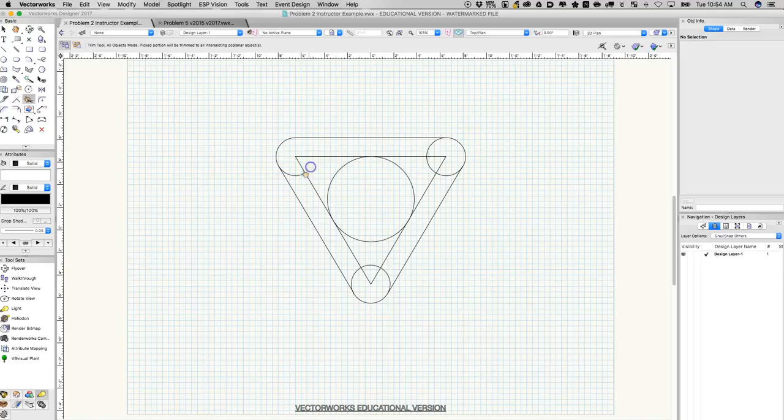So the first thing we need to do is we're going to do some trimming and cutting and some composing, and we're going to make this rounded rectangle into one piece. You'll see what I'm doing, so stick with me. So the first thing I'm going to do is trim off all these extra pieces of the circle. I'm going to grab my trim. See, I'm just coming along and trimming this guy just like this.

Okay, so the next thing I'm going to do is select everything, and I'm going to hold down my shift key and deselect this inner rectangle, this inner triangle, and this inner circle. So now I'm going to extrude, or I need to compose it first. I'm sorry, because right now if you look up here it's 7 objects. We need it to be 1 object.

So I'm going to come up here to modify, compose, and let's see why we have, let's see, it looks like there was an extra line in there somewhere. So good for us. I'm going to delete him. So now again we have our polyline, and I'm going to give this guy some fill. Let's give it solid, and now it's white.

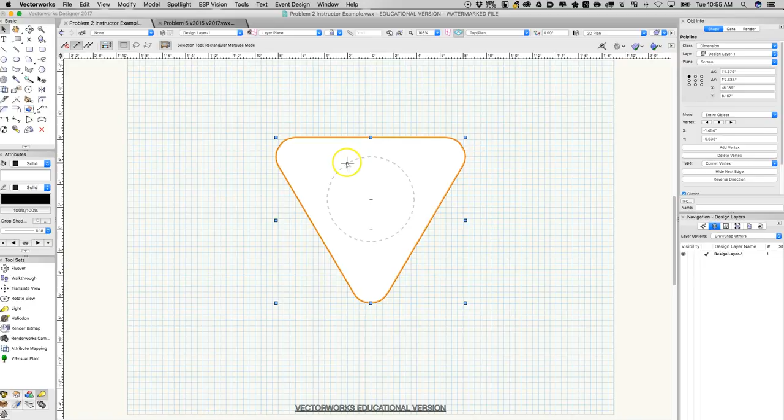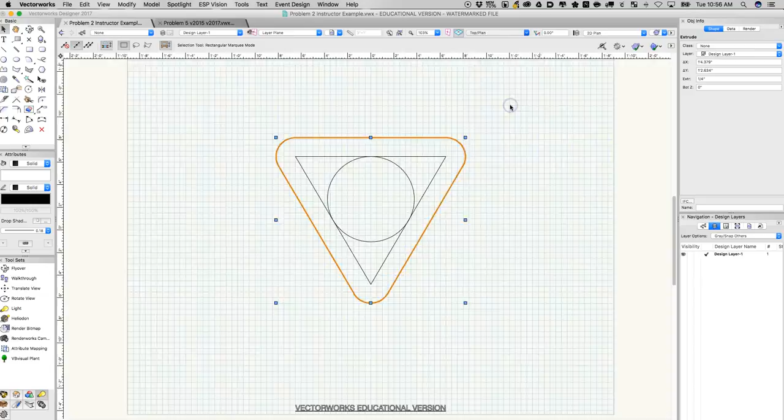So now we're going to extrude. And it looks like from the drawing that this guy needs to be extruded to 1/4 of an inch. So I'm going to go model, extrude, 0.25 inches. Okay. Now if we come and look at this, it looks like it has some depth, but we're not going to worry about all this other stuff yet. So I'm going to come back to top plan.

Now we're going to chop a triangle-sized hole through this piece that we just extruded. So I'm going to select my triangle and do model, extrude. And again, remember the piece we're using to cut with needs to be above and below the object we're cutting from. So I'm going to make him 2 inches just for grins. Come around to the front view. I'm going to hold down Shift key and the bottom arrow, and nudge it so it looks just about like that. Come back to my isometric view.

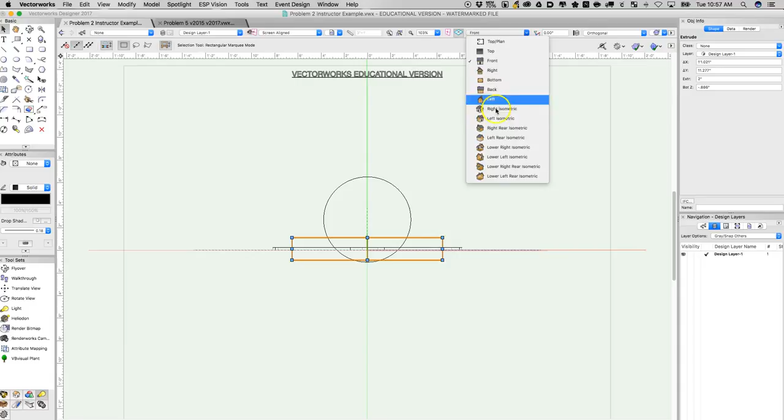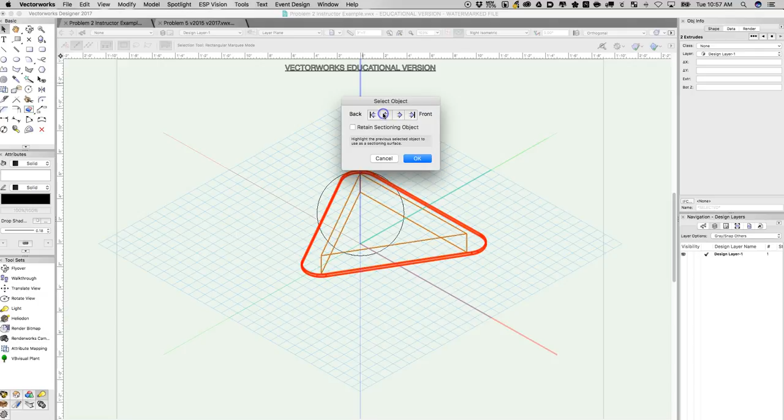Now again I'm going to select this object and this object. I'm going to select model, subtract solids. Now remember, we want this guy on the outside to be selected, so I'm going to use the arrow. Now we're all set to go. Click OK. Okay, that did not work out well. Let's Control Z. Let's look at him again from the front. Yeah, it looks like we're looking okay.

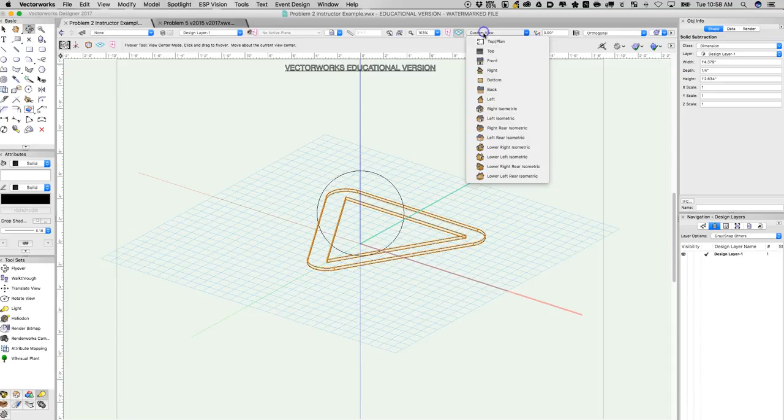Right, isometric. Select both these guys again. Rotate around just a little bit. And I think it's looking okay. So I'm going to model, subtract solids. There we go. Not sure why that got a little bit funky the last time. I might have had the wrong guy selected. So here we have our rounded edged triangular piece with a triangle hole in the middle. Come back to top view. Okay, now we need just a few more things to do.

So now we're going to put a sphere. That's what a 3D circle is called. I'm going to come down here to these geometric shapes. I'm going to click on them. Okay. Somehow it's not letting me click on that. Let's give this another try. Okay. All I had to do was move my recording window down a little bit.

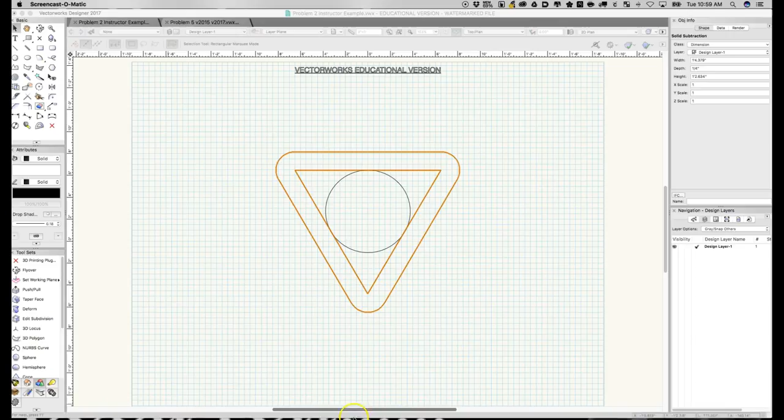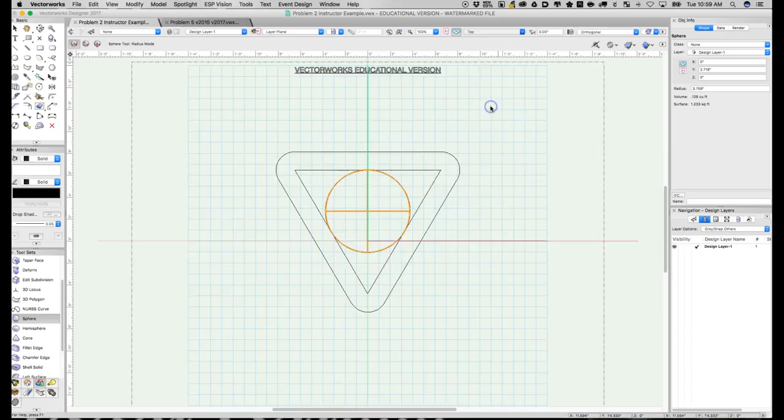So we clicked on these geometric shapes, and as you see here, there's something called a sphere. I'm going to click on it, and it's just like drawing a circle. I'm going to click from the center of this circle up to this guy. And now, if we go to our isometric view, we have our sphere in there. And I'm going to delete this circle.

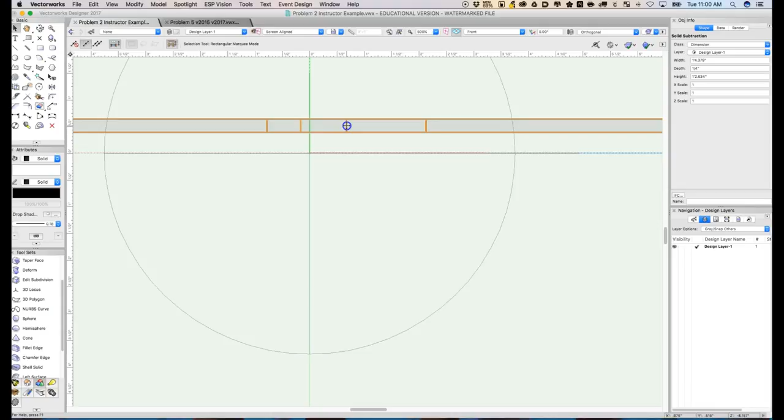So I'm going to look at them from the front. I'm going to zoom in here just a little bit. The only thing we need to do, if we look on the drawing, is this outside piece needs to sit right in the middle of the circle. So I'm going to drag him out just a little bit. Select right the center of the piece. Put him right on the center of this guy. So now zoom out just a little bit, and this big circle is sitting exactly where we want it to sit.

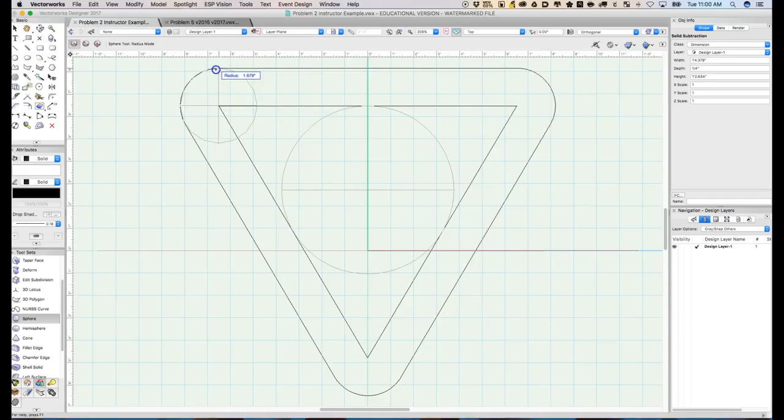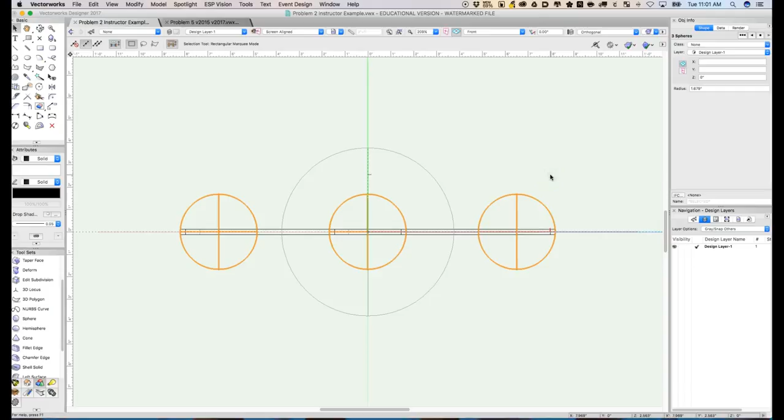So now all we have left to do is put in these three other little circles, and those are just small spheres again. Save, yes. Come back down to sphere. I'm going to make this circle, this circle, and this circle. I'm probably going to have to move all these guys again, I think. So I'm going to select them all. Come down to the front view. And actually it looks like the circles dropped in exactly right in the center of this. So let's look at this in isometric view again.

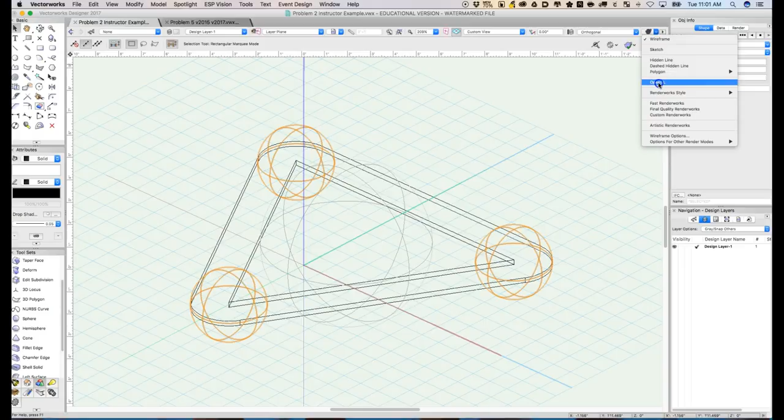Now I'm going to quickly do a rendering mode, and I'm going to show you this in class, but to set a rendering mode you come over here where the little tea kettle is, you click the down arrow, and I usually use OpenGL to show objects. We're going to use some of these other items in the class. We're going to use dashed hidden line eventually, but right now let's do OpenGL. It's kind of hard to see. I'm going to change this guy over, and now we can see as we rotate him around, here's our object. So that right there, guys, is Advanced CAD problem 2.